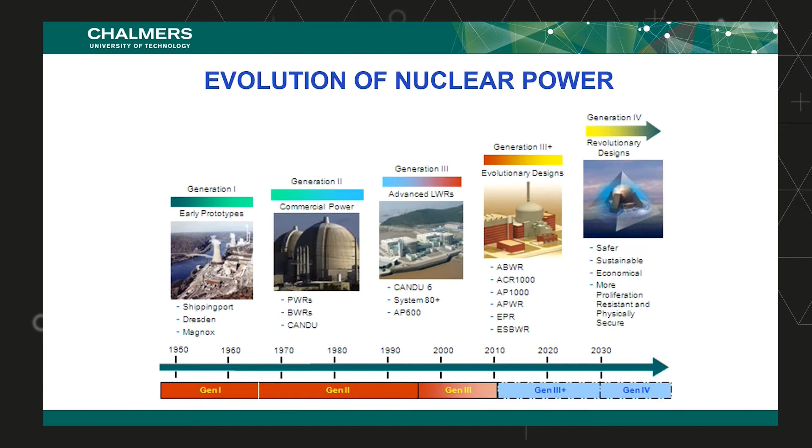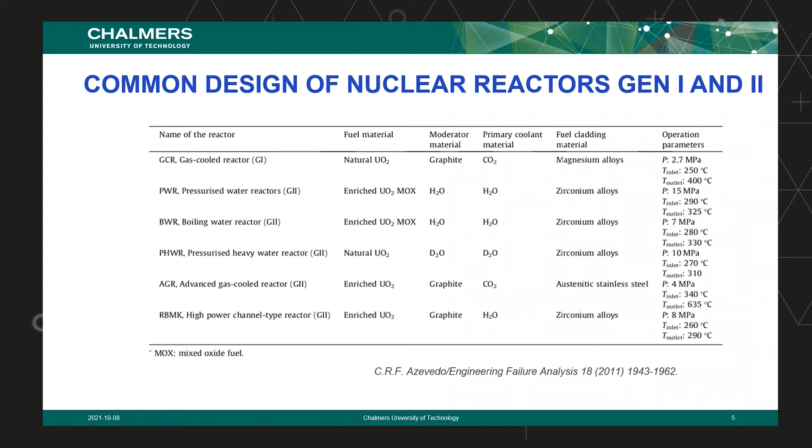The coolants also are changing. The reason is that having a fast reactor spectrum, then you have to look at what you use in order not to thermalize the neutron, not to stop their speed. And then, of course, you have to think about the safety. So then we have different types of coolants. We will talk a bit about this later.

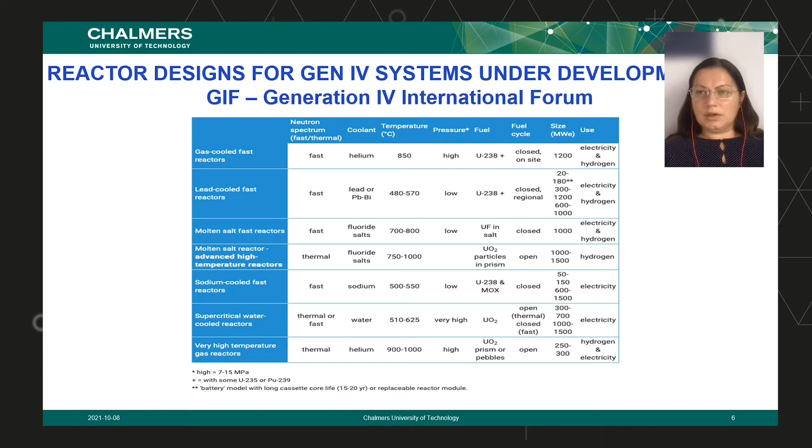So how about nuclear safety? What are the primers of the nuclear safety? Well, we talk about hazards. What hazards do we have? What are the most important? Fission products are highly radioactive, and some of them are also toxic by themselves. They don't have to be necessarily radioactive.

What is the aggravating factor when we talk about nuclear safety? Well, a nuclear fuel can never completely be shut down. So we have the decaying heat, we still have reactions which are ongoing, chemical reactions, but also due to the heat, you can have all kinds of different metallic phases which are still modifying. And what are the objectives when we talk about nuclear safety?

Of course, the objective is to prevent the release of radioactivity into the environment, and interaction with human beings. So for this, there are two main safety pillars we can talk about. There are much more, of course, but these are the main safety pillars. One is called defense in depth. That means there are multiple independent physical barriers.

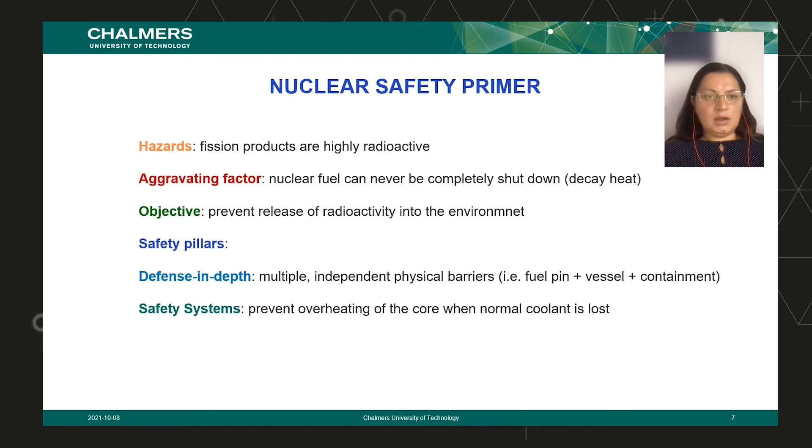Let's go to the next slide. So the physical barriers.

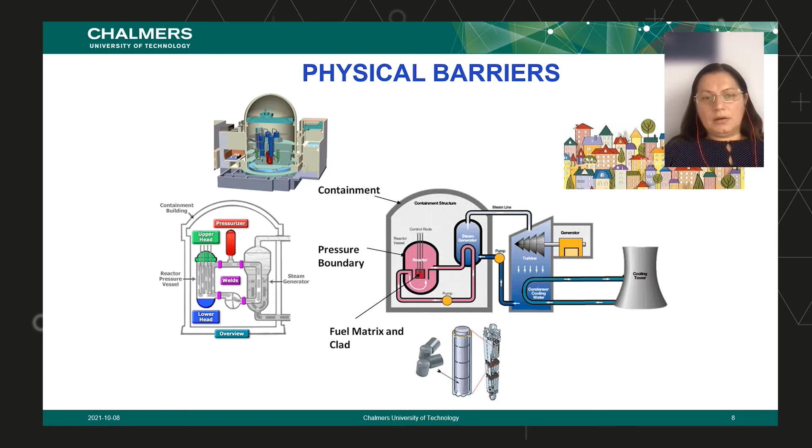Here you have a better picture where you can see in 3D almost how the interior of a containment looks, and where the core is placed. The core is here, the red part. You can see how many systems surround it in order to prevent any escape of radionuclides which could possibly escape by mistake from the core of the reactor.

And then, of course, all around, there are other systems which can function if the containment is still not damaged. All the other systems here are made with the thought that they should be independent and not come in contact with anything inside. So we have these heat exchangers here—the systems in the reactor shouldn't come into contact with anything that goes into steam or to the turbine. There are a lot of redundancy systems, and even these systems still have additional redundancy.

So it is one of the industries which takes safety very seriously, with continuous learning. The overall aim for all this is, of course, that nothing should end up here in the city or anywhere where humans, animals, or nature in general are present, because this can create a lot of problems.

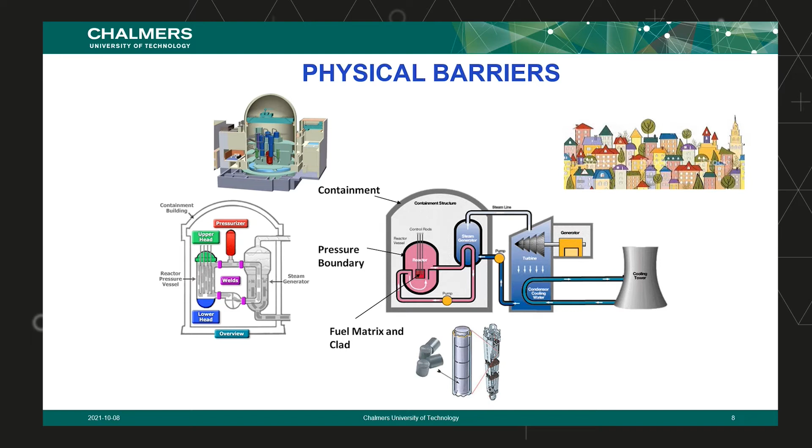Let's go, please, to the next slide.

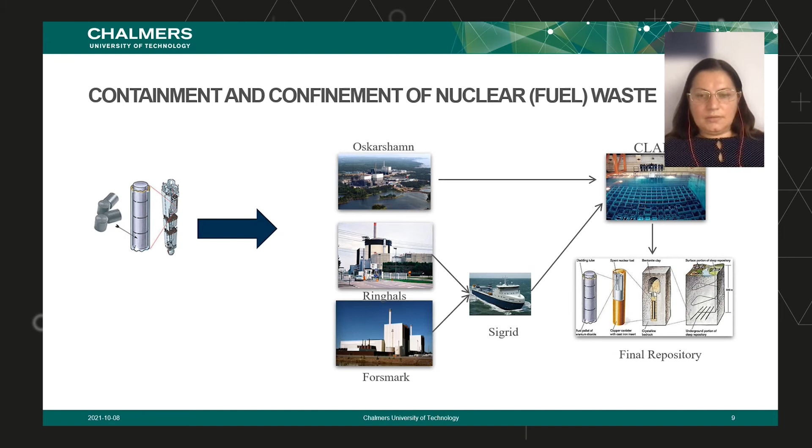So now we are going to talk a little bit more about the fuel matrix and the cladding, because this is a very important part of safety. As I said, safety goes from beginning to end, and it depends on the materials present in the fuel matrix and also the cladding. Why do I say matrix? Because you have different types of compositions and chemistries in a fuel, and it can be quite complicated chemistry, and the cladding can also be quite different.

So let's go and see the safety. When we talk about nuclear fuels, there are many types we can talk about, and they can either be commercially available already, under evaluation, or under research. The most used right now in the world are oxides - you have uranium oxide or MOX fuel. Then we have metallic fuels, which were used in the Magnox reactors a while ago.

Carbides, which are still under evaluation and research right now. We have nitrides - actually in my group we are doing quite a bit of research on nitrides right now, so it's one of the fuels already under evaluation, one step further from the research area. Then we have metal alloys, and we have inert matrix fuels, which are basically in ceramic forms.

And then we have a plethora of other types of nuclear fuels which are under research, and some of them are quite advanced. If you look at this TRISO, for example, which is tristructural isotropic fuel - the beautiful golf ball, it looks a little bit like that. This is actually quite advanced; it's one of the most promising nuclear fuels because it's extremely good when it comes to safety.

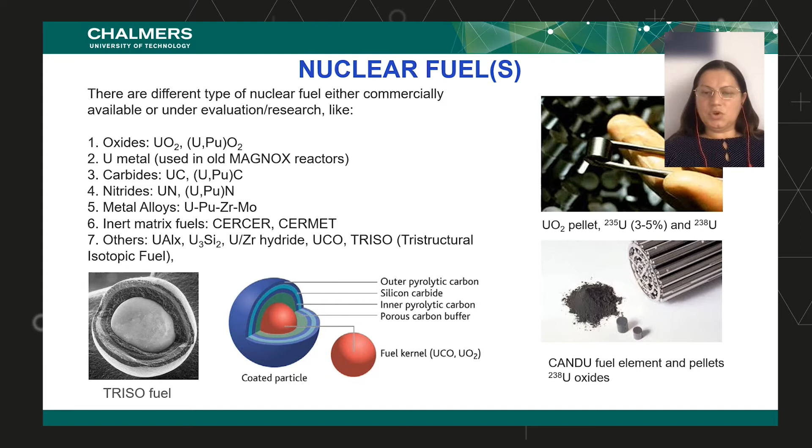Before that, we are going to look a little bit at the cladding materials. As I told you before, cladding materials are very important for safety, and this is why. First of all, it's because of the materials they are made of - they can serve to protect the fuel, but in the proper environment they can also play the role of a catalyst. You know very well that catalysts can speed up reactions, and then you can have chemical reactions which are not necessarily desired in a nuclear reactor, which can lead to severe accidents in the end.

So we have the well-known zircaloy, and you have it - it's this quite shiny, beautiful color. Then we have stainless steels, depending on what type of reactor you are using. But here we can look at the Kanthal type of FeCrAl material. And then we have all kinds of aluminum alloys for research and test reactors.

We have all kinds of refractory alloys, which can withstand very high temperatures. These are mostly used for gas-type reactors, which have much higher operating temperatures than other reactors. We also have research on ceramic matrix composites, and there are quite a few, but none of them is currently ready for operation. Still, this has been a good proposal, because different layers of composites might withstand pressure and deformation better than a metal.

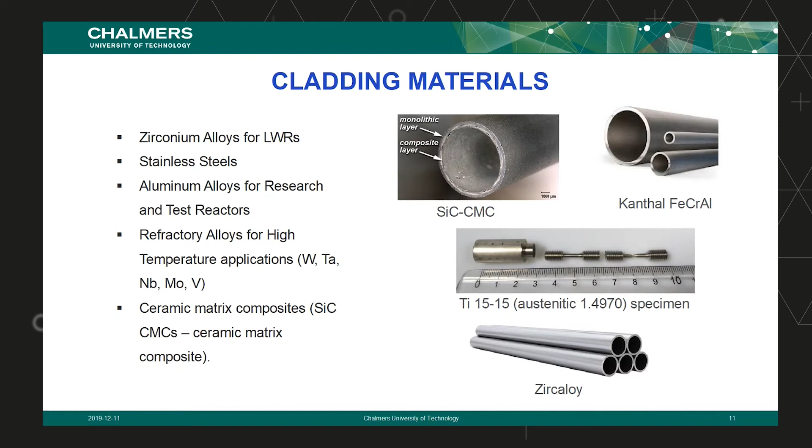That means material chemistry is one of the very important fields which, besides nuclear chemistry, has to be taken into consideration. And of course, they will have all kinds of chemistries included. Let's go to the next slide.

When we talk about coolants, this is also a very important part, because a coolant can play a very significant role as the barrier - almost the ultimate barrier before everything goes out from the containment of a nuclear reactor. So they have to both cool, and most of them also have the role of retaining some of the fission products produced in the nuclear fuel.

Historically, we have very interesting coolants. There have been a lot of liquid metals used - we have had mercury, sodium, potassium, lithium, and so forth. Today we are looking very much at lead and lead bismuth eutectic as being the most inert of the group. If you think about lithium, and what can happen with it - you've seen a lithium fire - then you understand how safety can be there or not.

The same is true with sodium. But sodium is actually a well-proven technology, which we know has been working quite well. Today though, there's a lot of emphasis put on lead and lead bismuth type coolants. We also have molten salts, which is another very important type of coolant, and today it's also one of the interesting coolants which we have.

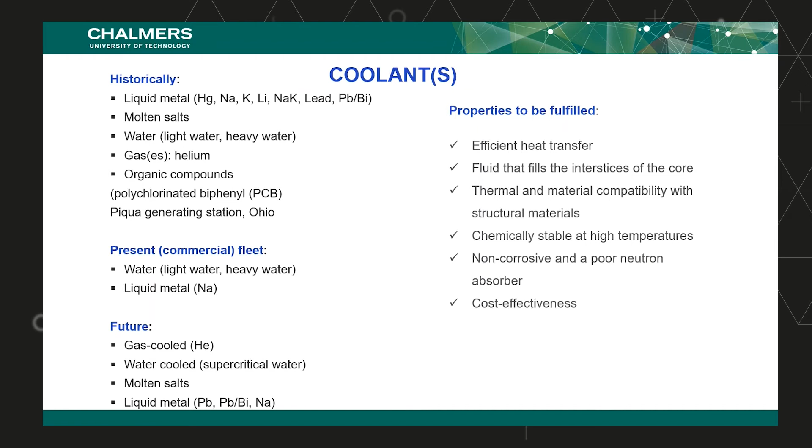So what are the properties to be fulfilled by these coolants for safety? They have to have efficient heat transfer, first of all. Then it has to be fluid in a way that it can fit into all the places and spaces in the core, so that they don't leave bubbles anywhere - because that would create a difference in temperature, which can lead to accidents. Then it has to be thermally and materially compatible with the structural materials. It has to be chemically stable at high temperature. And if you think about organic compounds, that doesn't really fit the picture.

Coolants shouldn't be corrosive and should have a poor neutron absorber, because we don't want to stop the neutrons from starting fission. Looking at sodium, lead, or lead-bismuth, you realize these are corrosive environments, so other factors must be added to the chemistry of these coolants. You also need a cover gas that isn't air, or is very poor in oxygen—probably argon or some other neutral gas.

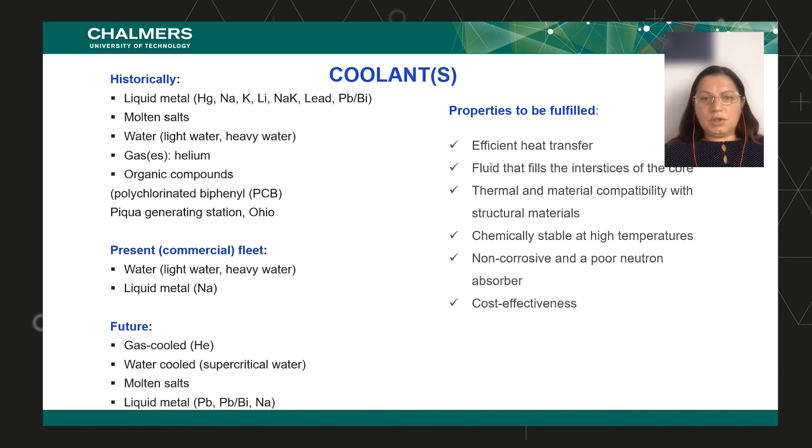Here are examples of some of the reactors I've been talking about. The first little experimental nuclear reactor, the EBR2, was cooled with sodium and located in the desert close to Idaho Falls in the US. This was the first time a reactor was connected to a grid, lighting three or four lamps—the beginning of the era of commercial reactors.

Then you have some of the advanced gas reactors, like the Torness Power Station in Scotland, pictured here. There's also a very interesting reactor cooled with organic coolant at the Piqua generation station.

Here's a picture of the first fast reactor, which we now call generation 4—though it wasn't really generation 4, many of you have heard of it: Clementine. The Clementine reactor was cooled with mercury, used plutonium-239 fuel, and operated between 1945 and 1954. It was a very small reactor, and you can see the control room wasn't so impressive—it could be operated by not many people.

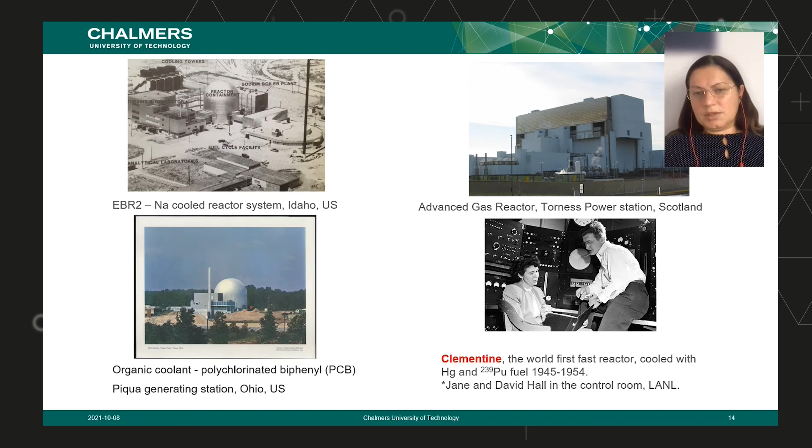Now that we've talked about the fuel, cladding, and coolant, let's look at the designs of the fuel assembly and cladding. Depending on the type of reactor, you can have different geometries of the assemblies placed into the reactor. These geometries serve functions: providing support and protection for the fuel pin bundle and other components, providing the controlled path for the primary coolant to flow through channels, and providing a compact structural unit that can be easily moved in and out of the core.

Why is that important? Of course, it's important for refueling a nuclear reactor. These components also have to interact with neighboring subassemblies in a way that assures safe and predictable reactor geometry, because calculations for the core's proper functioning depend on that. If you know the exact geometry of the core, you can determine ahead possible behaviors and prevent issues.

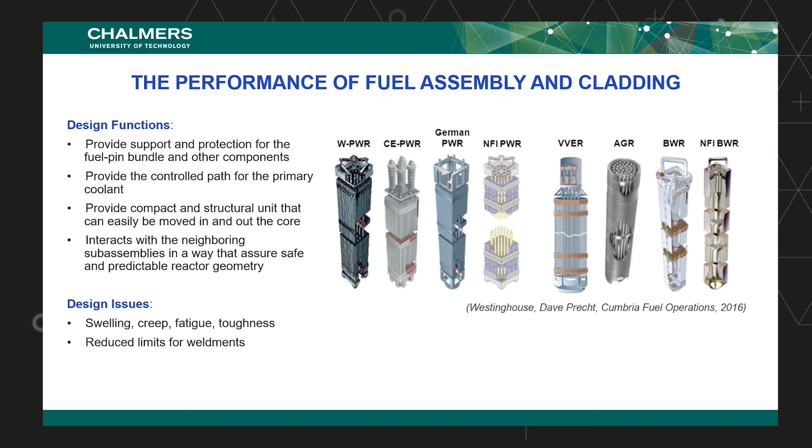There are, however, issues we continuously try to improve: swelling can happen in the material, creep can happen, fatigue and toughness are concerns, and of paramount importance is the reduced limits at the weldment. When you weld something, you're knowingly introducing a defect into the material—you know the structure isn't the same anymore because it's a weld, and you know how many welds exist and where they are. These are the design issues we know about.

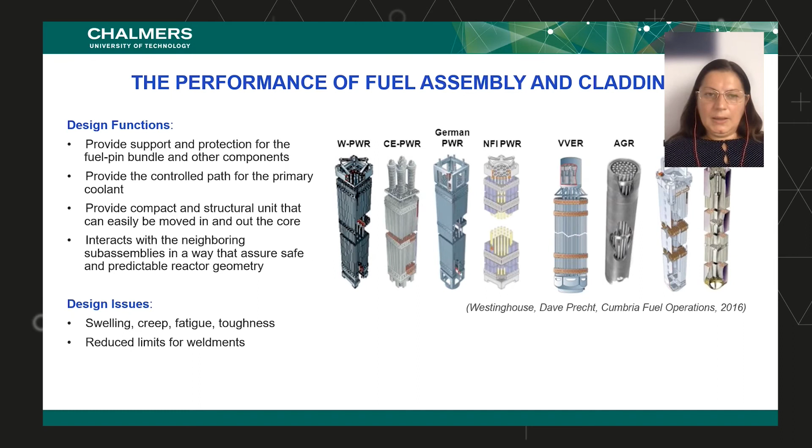I'm sorry, I have somebody which wants to come in here.

So you already prevent some things which will happen due to irradiation when you start producing - this is, by the way, a fuel rod which is made for oxide fuels. In their case, we can talk about significant release of gases, and also we have the volatile products which are released, which will end up in the gas form. So that means this plenum will fill gradually with different compounds and gases resulting from the irradiation.

So knowing this, how the fuel rod looks like, then you already have a very good case where you can prevent and know the future behavior. So this is the safety of the fuel pin, we call it. And of course, this together with the rest of the reactor is going to be, in a way, easy to prevent and calculate certain events, unless it's a sudden thing which you cannot prevent at all, like a natural disaster. Next, please.

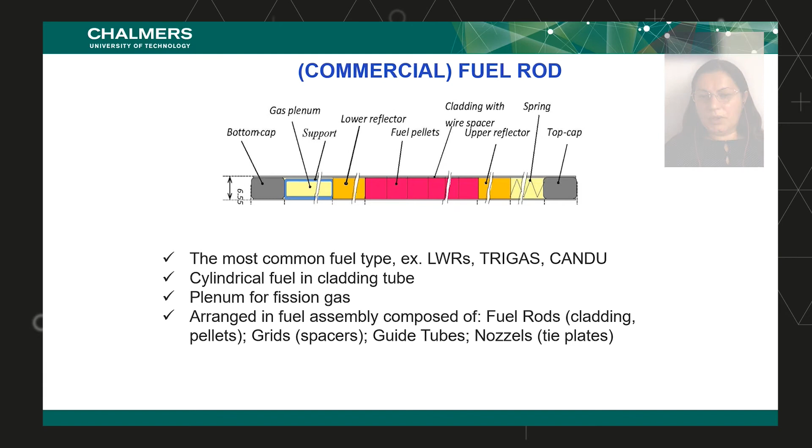When you think about the performance of the fuel assembly and cladding, we were talking a little bit about what they need to withstand, and the cladding has to survive, and it has to be very predictable. So wastage we were talking about is basically the corrosion by the coolant, the fuel cladding chemical interaction. Also, I told you that you have a lot of interaction - it's material chemistry basically here.

And then you have also the mechanical part, the mechanical dimension, where you have the mechanical interaction, the fretting. Fretting is basically when the coolant goes by the walls of the material, and then you have potential damages which can happen during that time.

Then we have strain. What is the strain? It's the fission gas pressurization. As I showed you before, you can have gas release due to the fuel irradiation.

Then you have the swelling and associated creep of the constrained components. So, of course, if it's too much overpressure and you also have this heated surface of the fuel, then you have a material which is a bit more elastic and it's easier to modify. And then you will get a bit of swelling.

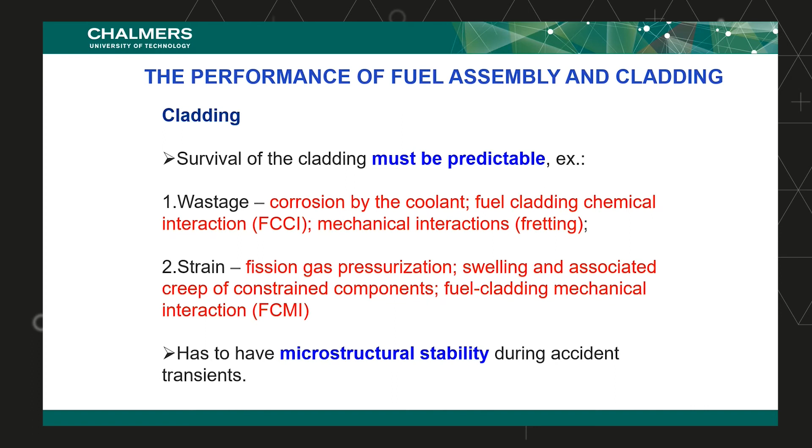And that pore will probably make it easy for the coolant to try to enter the pin. And the result can be a possible fuel coolant interaction. So the coolant will come from the outside and interact with the fuel inside. Now, depending on the operation condition, the products of the reactions, when you have the small pore, they can increase in size, and basically they are growing like a crystal. It's not really exactly a real crystal, but this is just to emphasize how it can happen.

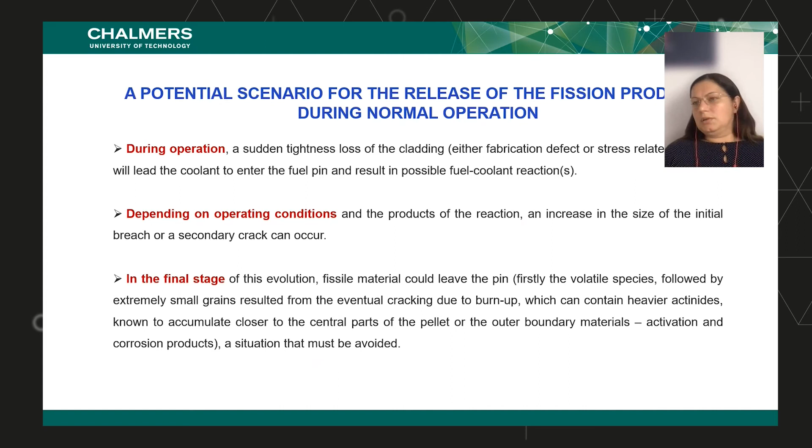And this can increase the size of the initial breach to a secondary crack, so you can really have a crack in the material. And then in the final stage of the evolution, the fissile material can leave the pin.

What leaves first and how depends a little bit on the type of damage. But if it's a small damage, you have these kinds of steps: the volatile species go first, followed by extremely small grains resulting from cracking of the fuel due to burnup. This can also contain heavier actinides if the material comes from the center part of the fuel. Then you can have a release of the material into the coolant. This situation must be avoided at any price, but it is happening.

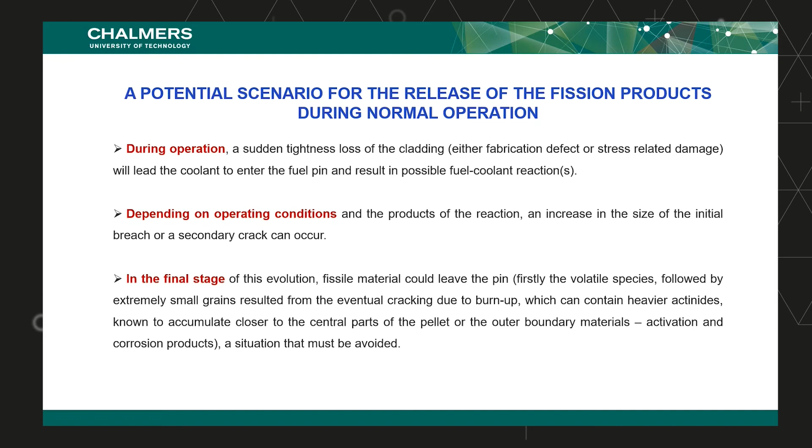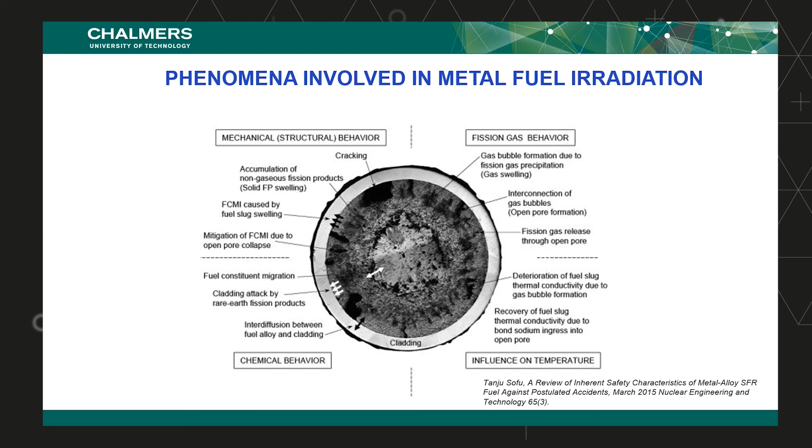So then you can think a lot of chemistry is happening there. If you know this chemistry, depending on what type of coolant you have, you can realize what kind of reactions you will have with the coolant before it escapes from the containment into the atmosphere. So you can predict and calculate the chemistries, and also if something is going to be soluble in water afterwards, and if so, it can go down into the soil and so forth. And of course, we have the fission gases, which from one pin is not much, but if you think about the core, then you have quite a bit.

And you have a lot of iodine released. Iodine is known to be one of the first to affect a human being if it's released in enough concentration in the air. So this is a very important part to be known and to be studied.

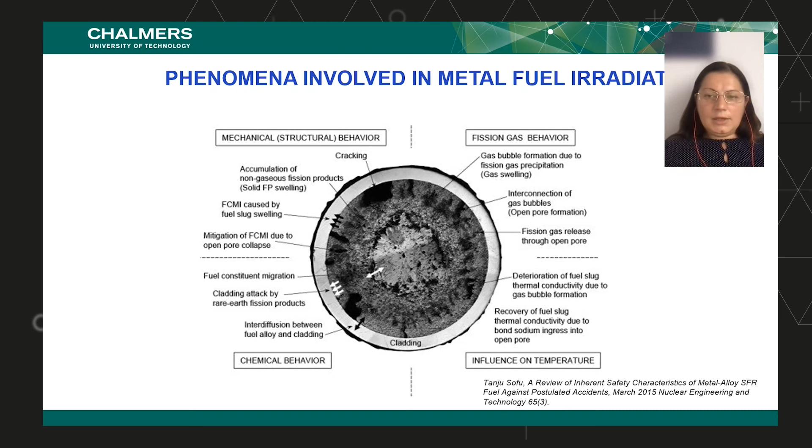So as you can see, this is a cut through a high burn-up fuel. This has been a metal alloy, so it's not an oxide alloy, by the way. So I think we're going to the next page.

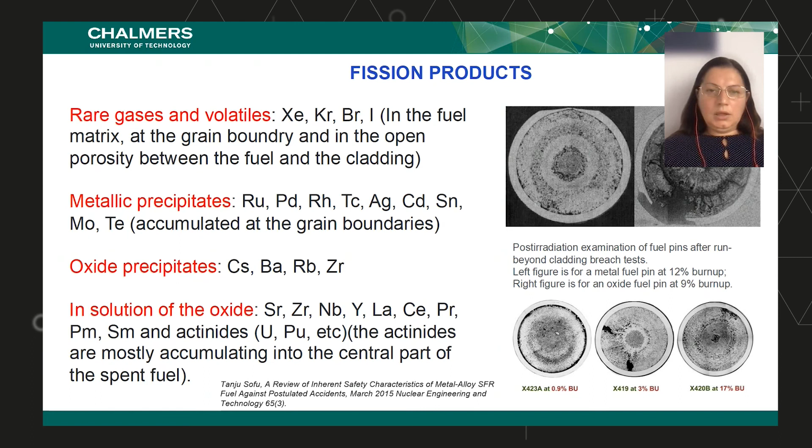So this can provoke rupture, and then you can see how the fission gases can be released into the coolant.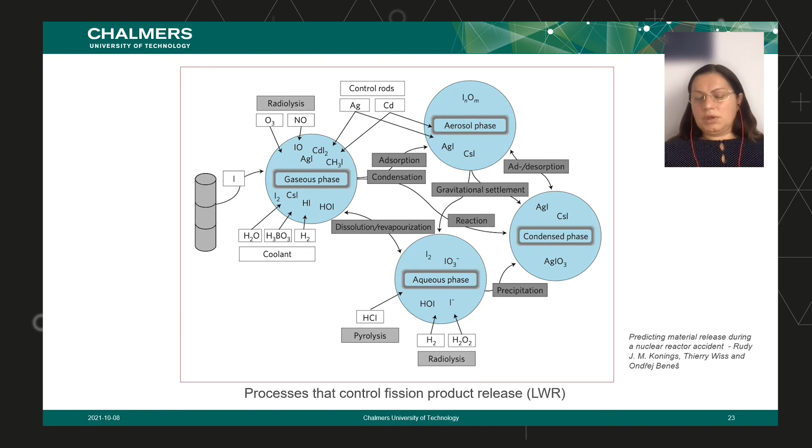If you think about this, all this chemistry could be predicted because we know how iodine reacts at certain temperatures and conditions, and what materials are close to it which can interact and react to form another phase. So thinking about reactor safety, it's a lot of lessons learned from the past and a lot of developments in chemistry and reaction chemistry, which have brought us to the level that today we can predict this kind of behavior.

When we think about fuel-coolant interaction, this is very interesting, and the chemistry has been studied quite a bit, so a lot of aspects are known. We have different types of chemistry depending on the coolant. The current studies for the generation 4 reactors being studied today focus on the fuel and LBE, these metallic coolants. We are studying this in Europe. In MOL we have a lot of work going on, where we also have the research reactor called MYRRHA. KIT and JRC in Germany have a lot of setups and loops studying this. We have ENEA in Italy and also universities associated in Italy, and then research going on in other places like Sweden and other countries in Europe.

So what can we say about that? Well, the metallic coolants do have some clear disadvantages. Any impurity which enters the flow of the melted material can possibly be a seeding point for crystalline growth. So basically you are growing crystals on the surface, and if you do that, we know that can block channels, and if the channels are blocked, the coolant flow is not working properly. That means we have areas where the temperature is going to be very high, and then we have swelling and potential holes produced, as you've seen earlier.

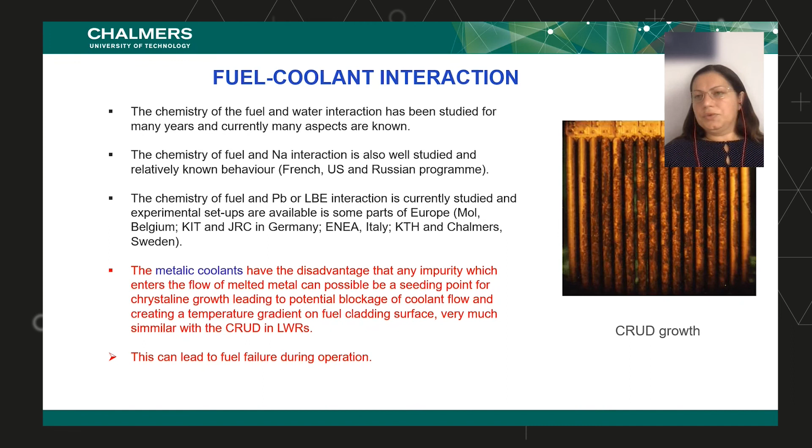Of course, all these issues, both in light water reactors and also in future generation 4 reactors, can lead to fuel failure during operation. And this is something which we want to avoid.

So I was talking about the MYRRHA reactor. It's a research reactor which is projected and on the way to be built in Belgium at the SCK CEN area in MOL. It is a multi-purpose research reactor. It's very beautiful, you can read a bit more about that later. But basically what we are looking at, and what a lot of our research is focused on, is the lead bismuth coolant and its interaction with the fuel.

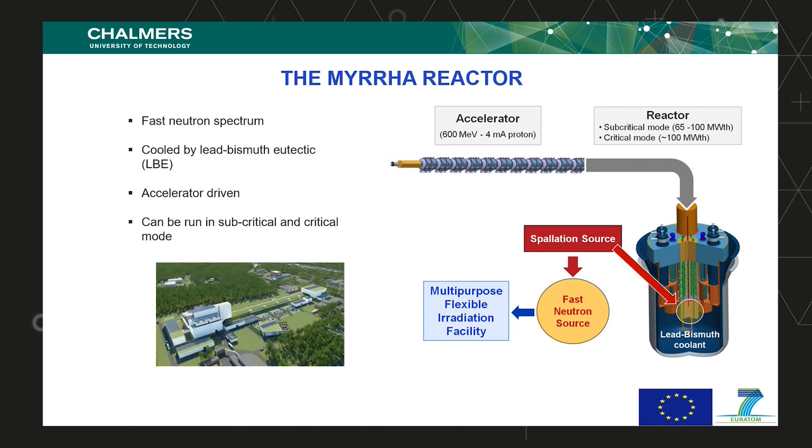One of the projects we have been looking at is called SEARCH, Safe Exploitation Related Chemistry for reactors which are cooled with metals.

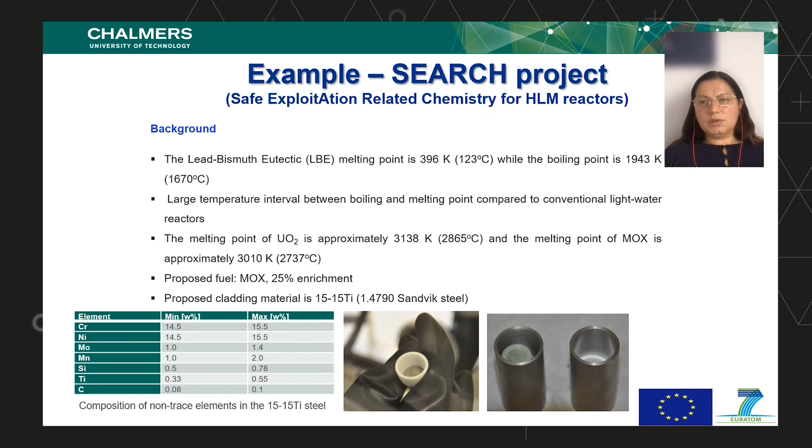Some examples of what we look at: we can look at lead bismuth, which has a eutectic point of 123 degrees, and it's quite good because the boiling point is very high. That means you have a very good coolant for the reactor, and then you have the possibility to use different types of fuel there. Then we looked at the interactions between the fuel, the coolant, and the cladding. The proposed material is the one I told you before, titanium 15-15, so it's not zircaloy anymore in this case.

What basically we have looked at is what happens with the volatiles, the ones which come out first from the reactor, from the fuel, when something has happened. So we looked at iodine, cesium, ruthenium, and then we have the reference, which is basically the samples we need to compare with. Then we look at different temperatures, what is happening and what we could collect from the surface. You see the colors are varying quite a bit because we have had different materials forming.

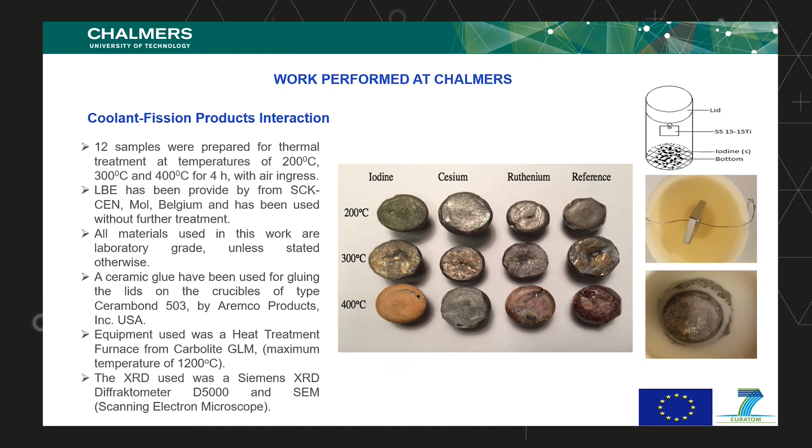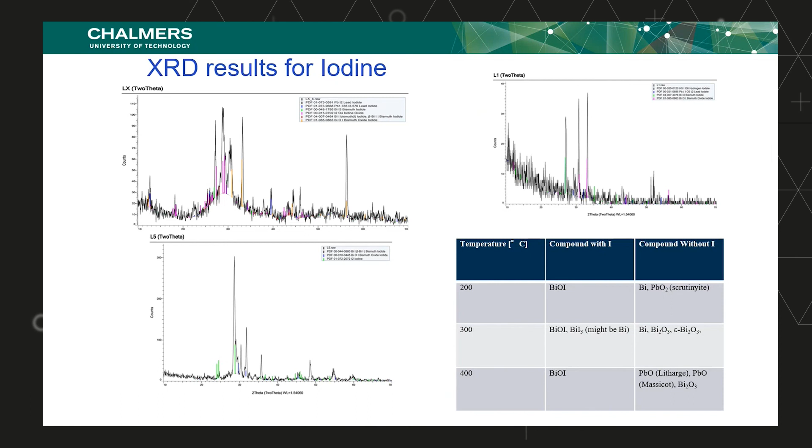So then we could collect the samples and we analyzed them with XRD for iodine, and we found that a lot of compounds are forming depending on the temperature, which is also very good to know. So when you make a calculation for safety reasons, you have to know what phases are forming at different temperatures and also different compounds.

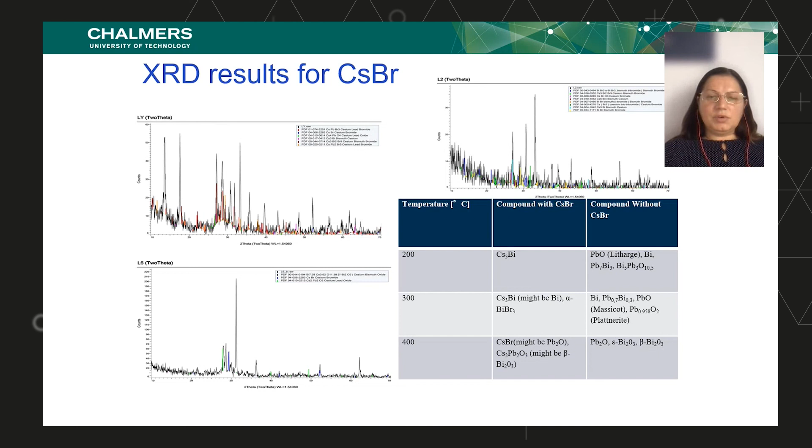And the same with cesium. You can see that in the case of cesium, you have probably even more interesting chemistry than with the iodine. You have a bit more reaction. The temperatures are good for this type of reactions.

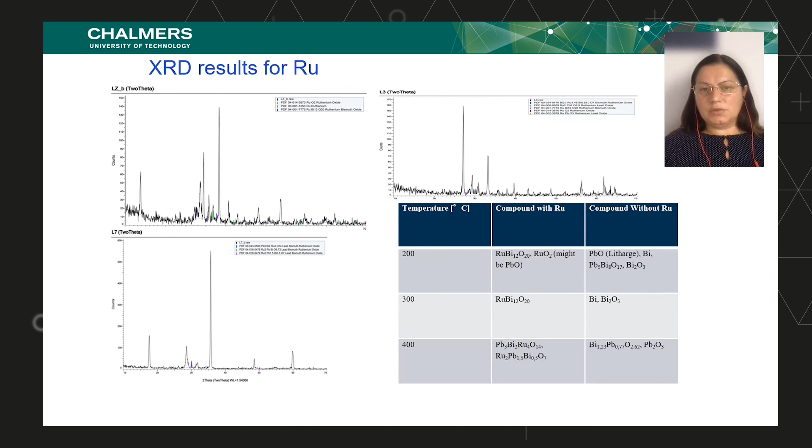Next, please. And ruthenium also is forming quite a bit of compounds, some of which can be soluble in water, while others will be quite inert. When you find out that something is inert, that means not all these compounds will damage or be dangerous when they come out in nature, and probably won't react with anything. That means they cannot be transported further so easily. Next, please.

So to wrap up, basically everything we said so far about safety of a reactor is that chemistry and chemical approach are a very important part of the operation of a nuclear reactor. And we have had a lot of lessons which we learned along the years, from the beginning, from the Oklo reactor, where we could see what compounds have moved and how long they have moved in nature. We also know by now that the right chemistry combination of the fuel, cladding, coolant, and the surrounding material are the basis of the safe operation of the reactor.

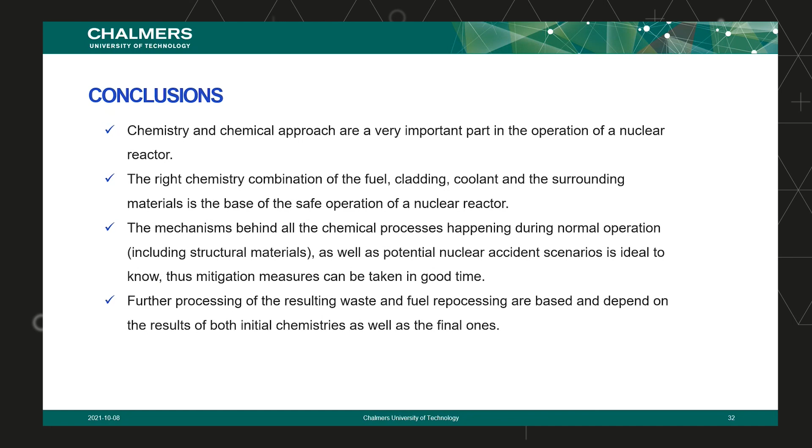And why I say that is when you have certain materials which can be a catalyst, you might not want to have this happening, because then you can have other damages happening. The mechanism behind all the chemical processes happening during normal operation, including structural material, has to be well known, and you need to know the mitigation measures you can take in good time.

And then you also know that when you know all these details, the further processing of the resulting waste is easy and is dependent basically on the results of both the initial chemistry as well as the final chemistries you have when you get the fuel out from the reactor.

So to conclude the lecture today, basically the chemistry of a nuclear reactor is what actually is the safety of the nuclear reactor. So I would like to thank you very much for listening to me, and now if we have time, then I would take questions. Thank you.